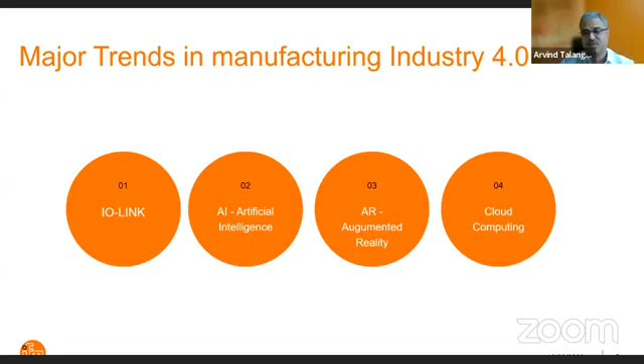So the question is, what prevents the technology from being adopted quickly? This is not a new concept. Many new technologies have come and gone from the industrial space, claiming to be the latest and greatest. The main barriers usually revolve around three major C's: cost, change, and complexity. This is the main reason why new tech isn't adopted quickly, or at all.

But what if we could eliminate these barriers? What would you do? This gives an understanding of how industry revolutions took place with respect to technologies and the importance of Industry 4.0.

As an industrial company, whether you are solving a specific problem or working through a large digital transformation project, collecting and analyzing data is a critical part of the solution. The industrial Internet of Things, IoT, enables intelligent decision making by leveraging data to optimize operations, increase performance and availability of equipment, improve product quality and shorten time to market.

So IoT would accelerate and simplify the process of creating connected products and services for industrial environments, with expert application of technology to collect machine generated data, networking of all kinds, and advanced big data analytics. So what is Industry 4.0?

The most recent evolution in manufacturing, called Industry 4.0, is actually enhancing computer assisted manufacturing through machine learning and smart technology. The latest industry evolution brought the manufacturing process into an age where computers and automated machines enabled factories to produce products on a massive scale.

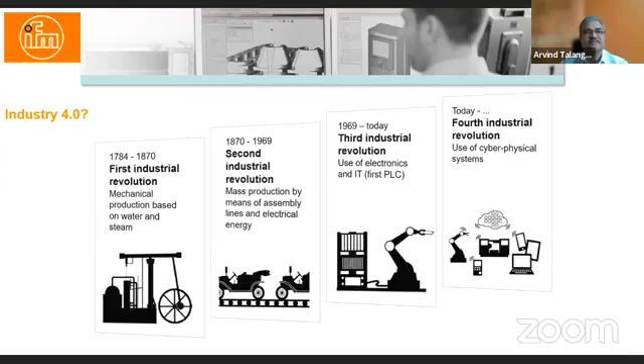So in order to remain competitive, companies regardless of their size will have to invest in digital technology. It's just not enough to see opportunities, we also have to seize them.

According to some experts, the most important prerequisites for this trend are intelligent products and innovations, as well as new business models, which only become possible through digitalization. On one hand, they have to develop in an agile way; on the other hand, they have to support their employees and focus on the requirements of the networked customer.

Digitalization specialists think that particularly small and medium-sized companies will have to become active. Despite reservations and initial difficulties, companies have come to the same conclusion, as becomes visible in a recent survey. Despite the impression that digitalization may be a threat, more than 80% of those asked stated that Industry 4.0 is more a chance than a risk.

Nevertheless, being aware of the potential offered by digitalization is not enough. It is not enough to see opportunities; you also have to seize them.

The information gained helps companies of all industries to improve their value chains and optimize their processes. This is where the role of data actually comes into the picture. For industry, this means new business models may emerge from evaluated machines, the use of sensors, and real-time processing of vast data volumes.

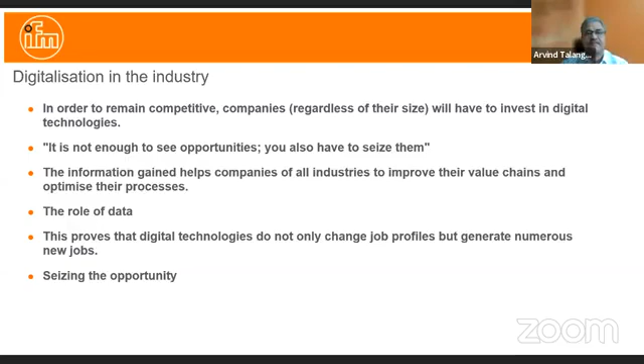This is exactly what we have actually tried to accomplish. Some of the fundamentals of digital transformation are digitalization by virtualization of all devices through an Internet of Things, and convergence of organizational and physical processes, where our goals are identification and avoidance of waste and inefficiencies. There are numerous opportunities, in fact.

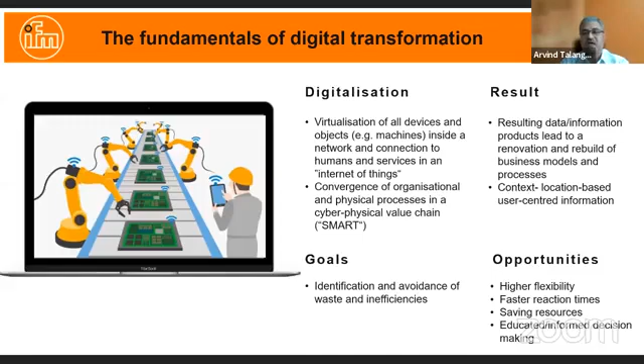The fruits of digitalization, and how digital technologies create new jobs. Digitalization changes all areas of our life, such as leisure time, consumption patterns, and the working environment also.

On one hand, there are many more IT expert jobs vacant in Europe. On the other hand, about 1 million people have to learn and revise their way of thinking. No doubt the working environment is in flux; both chances and risks are to be addressed.

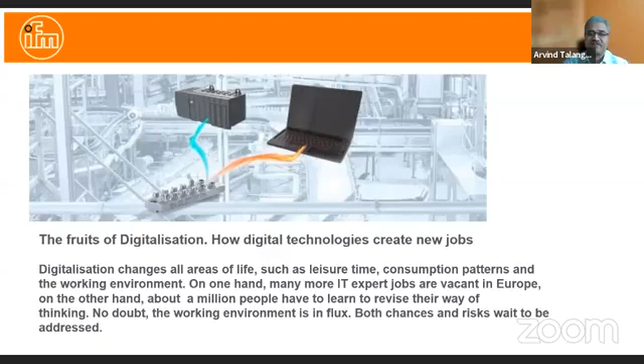A typical digital value chain would be, for example, from R&D to sales and supply chain, to manufacturing and after-market service. The whole of the chain includes smart products, energy management, and track and trace applications. So the entire digital value chain gives you transparency, flexibility, individualization, and integration — these are the key principles here.

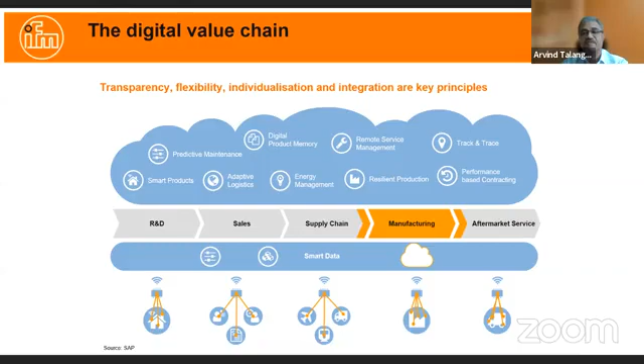One of the very first and prominent state-of-the-art technologies is the advancement of IO-Link, which is a communication protocol towards sensors and actuators.

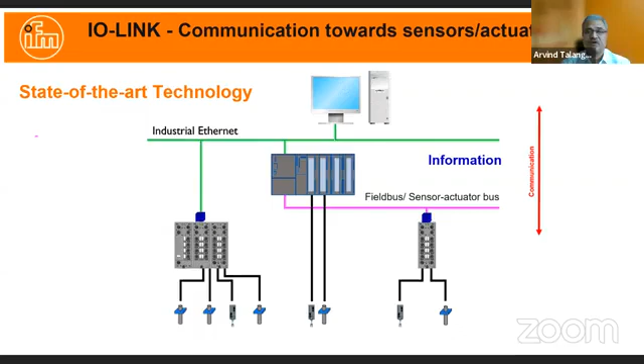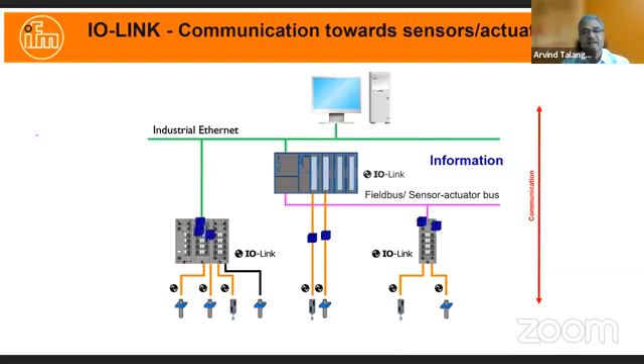As you can see, there are field devices that are actually connected to controllers. Now, with the help of IO-Link, which is a new way of connecting field devices, you get not only the data, but also the ability to control the process and the machines.

This IO-Link, which is one of the major trends in Industry 4.0, is the first step for IoT. It enables process transparence from the sensors to ERP, with different measured values from one sensor. Another advantage is tamper-free operation, with unique identification of each and every element of the sensors. These sensors can be replaced very easily, and almost all control manufacturers are involved in this IO-Link development.

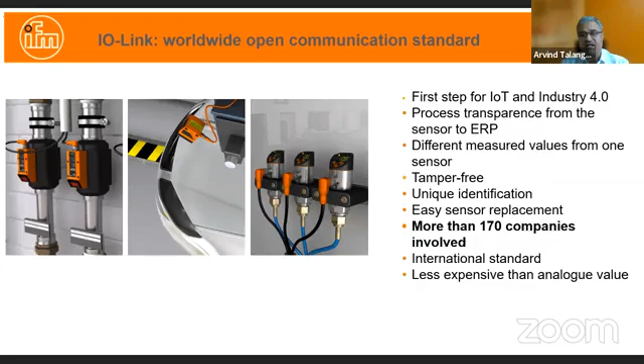And this is, as already informed, less expensive than analog value. You can see here the consortium of IO-Link. Almost all the control manufacturers and related companies are into this IO-Link manufacturing.

In short, in conventional systems, values of analog sensors undergo several analog to digital conversions until they finally reach the PLC. This is where we try to find out the difference between how analog is connected versus IO-Link.

For example, a pressure sensor having 5.5 bar pressure, when connected to analog value here in the PLC, actually gets converted from analog to digital and digital to analog. In the output, your 5.5 bar input pressure comes to 5.3 bar. So there is a loss of almost 0.2 bar, because of the analog transmission from the field device to the controller.

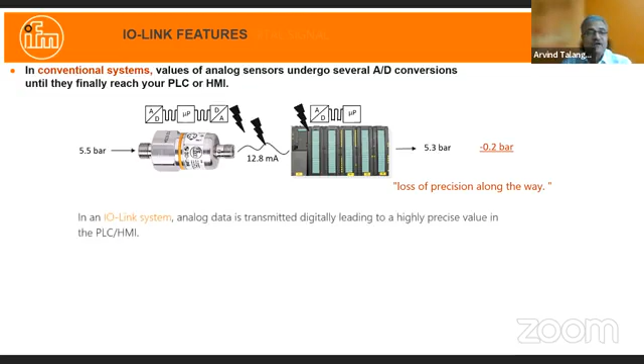While in the case of IO-Link, this analog data is transmitted digitally. So there is always high precision coming in, because this 5.5 bar pressure, when converted to the PLC, is exactly 5.5 bar. This is the advantage of IO-Link when connecting any field devices to the manufacturing.

Some of the trends in IO-Link are, say, profiles. In the case of profiles, via the function block, the PLC can access the process values of IO-Link devices from different manufacturers online at any time. Since the data is provided in a standardized way, thanks to the communication specification and the profile parameters stored in the sensors, these different sensors will have an IODD file, which contains bit information about the output, the diagnostic data, all this is inside the IODD file.

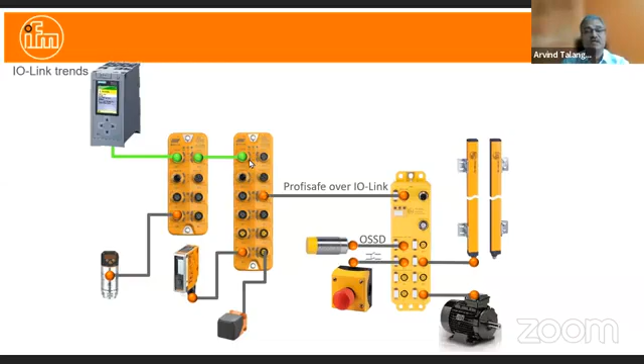Another trend is IO-Link safety, because over the years IO-Link has become established as a sensor actuation communication system. To benefit from this in the field of safety technology, IO-Link safety has also been developed, offering advantages such as reduced wiring, fewer conventional input and output cards needed, and the use of analog measured values for condition monitoring. A typical IO-Link safety setup is like this: an IO-Link ProfiSafe card, which has input from safety products like safety barriers, safety proximity switches, and so on, connected to a ProfiSafe card, and this becomes one port of an IO-Link master to which all other field devices are connected.

There is one more trend: wireless. In the field of automation, mobile communication standards such as IO-Link, 5G, or even Wi-Fi 6 are becoming building blocks for real-time machine-to-machine communication. So IO-Link is also coming into this space.

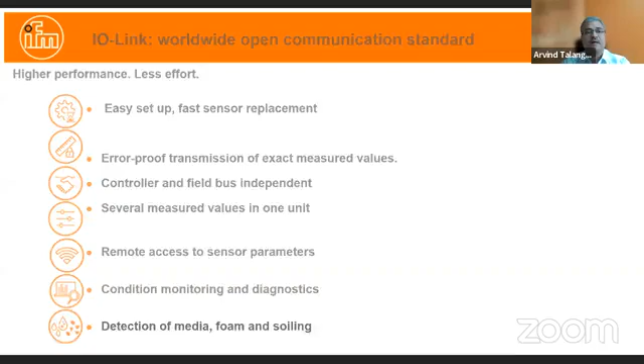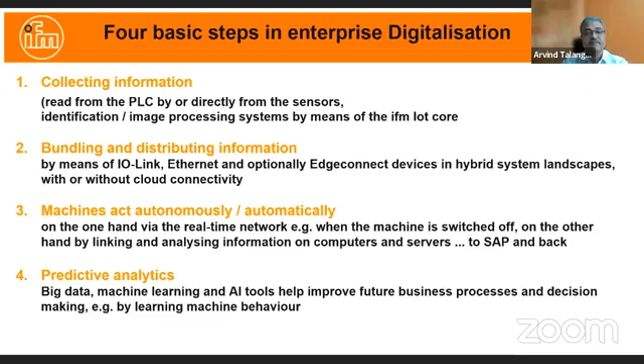And the last is predictive analytics. Big data, machine learning, and AI tools help improve future business processes and decisions by making machine behavior learning easier. A typical example here with Industry 4.0 is with the help of IO-Link.

Here you can see 2 motors with vibration sensors mounted on them, which are connected to an IO-Link master. This IO-Link master gives you data of a root cause report. It can also give you raw data. For example, in case of vibration, it gives you data of VRMS, ARMS, A peak, crest factor, and temperature.

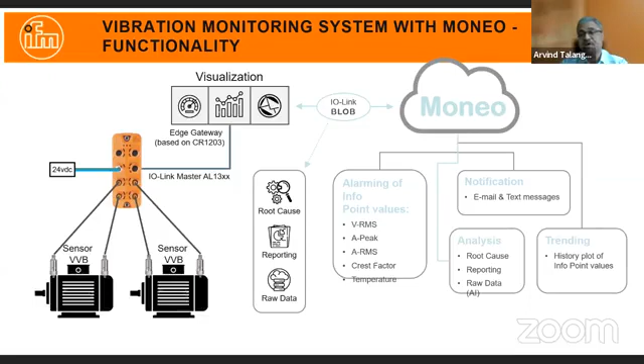So all these alarming points are being taken care of. The analysis is also taken by root cause, reporting, and raw data. It also gives you notification, email, and text messages, and it also gives you a plotting of history or reports with this visualization and IO-Link BLOB.

Another trend is, for example, artificial intelligence. Artificial intelligence has performed routine tasks for some time now, but with machine learning, the technology is poised to increase its scope. Traditionally, artificial intelligence operates from a set of rules that provide guidelines for actions. Today, AI goes back to review decisions made by human beings and uses it to help create new rules or refinements to existing rules. This increases the number of use cases where AI can operate independently.

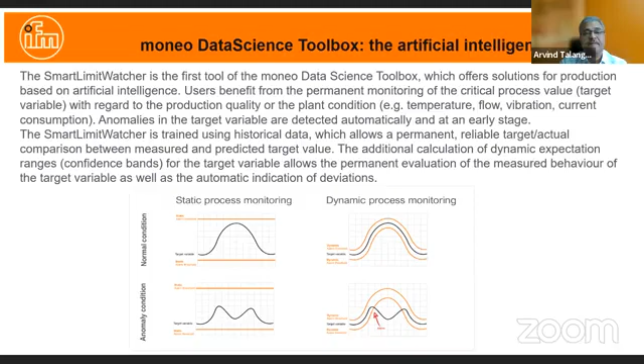Here, for example, a SmartLimitWatcher of IFM Electronic is the tool of the moneo DataScience Toolbox, which offers solutions based on artificial intelligence. Users benefit from the permanent monitoring of critical process values with regard to production quality or plant condition, maybe temperature, flow, vibration, or current. We are actually trying to differentiate a static process monitoring as a normal condition versus an automatic dynamic process monitoring. One example is smart pump monitoring, extensive condition monitoring of a supply pump.

The supply pump is actually a critical component of a CIP plant. It ensures media circulation through the entire system. If the supply pump fails, the entire plant process will come to a halt. Now, as the pump is operated at various speeds depending on the cleaning steps, static monitoring is very difficult. The aim is to implement artificial intelligence-based pump monitoring in order to detect and report any deviation of the operating state in time.

So maintenance works can be carried out in real time. Many parameters of the pump, like current flow rate, pump outlet, current pressure, vibration data, operating hours, and pump motor surface temperature - all these parameters are being taken care of by artificial intelligence.

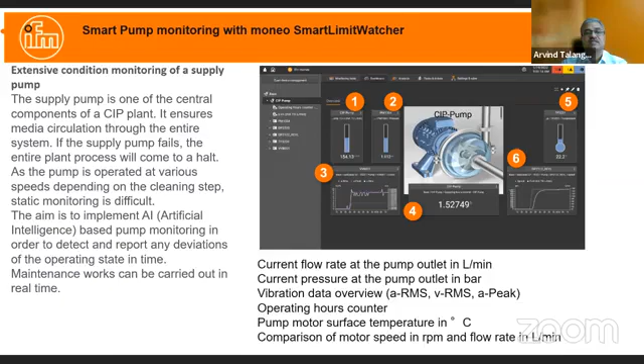Another trend is augmented reality. Actually, augmented reality replaces, in a common man's sense, a paper with a screen positioned in the worker's view. The screen superimposes work instructions on the physical material, so the operator can see the right way how the work should be done. This helps ensure that workers use the latest processes and revisions and can also reinforce training. As a result, productivity and efficiency improve and costs go down.

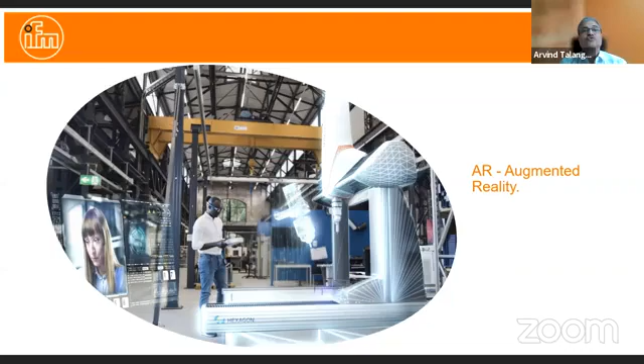One of the new AR headsets, Magic Leap 2, features the PMD, that is Photonic Mixer Device 3D technology, which has been developed by IFM Electronic, and which actually finds out the depth. Some examples in the automotive market are that this technology is used to operate an infotainment system, by gesture control to monitor occupants in order to trigger airbags intelligently. In the exterior area, the 3D technology covers environmental monitoring in the near field around the car.

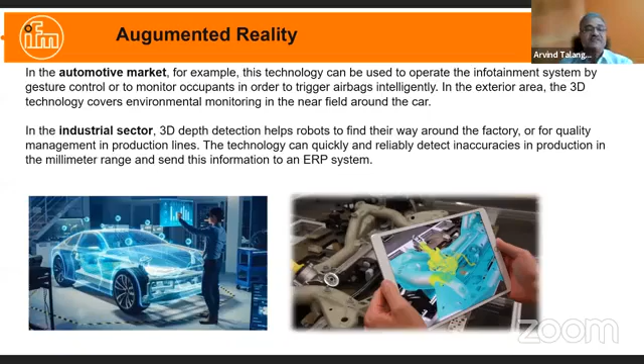In the industrial sector, for example, 3D depth detection helps robots find their way around the factory, or for quality management in the production line. The technology can quickly and reliably detect inaccuracy in production in the millimeter range and send this information to an ERP system.

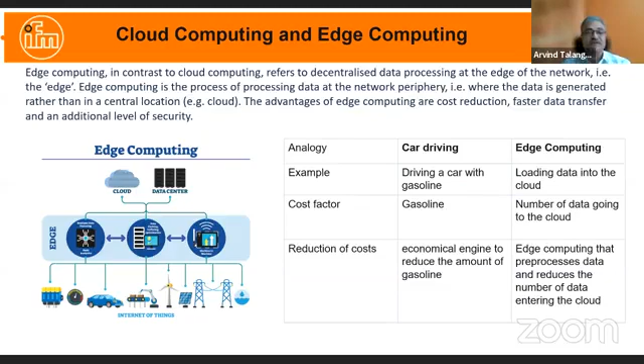Edge computing, in contrast to cloud computing, refers to decentralized data processing at the edge. Edge computing is the process of processing data at the network periphery, where the data is generated, rather than in a central location. The advantage of edge computing is cost reduction, faster data transfer, and an additional level of security. Here we can see some analogy of how car driving and edge computing relate. There are different types of cloud computing: private cloud, public cloud, and hybrid cloud. Depending upon our requirement, we can choose different clouds.

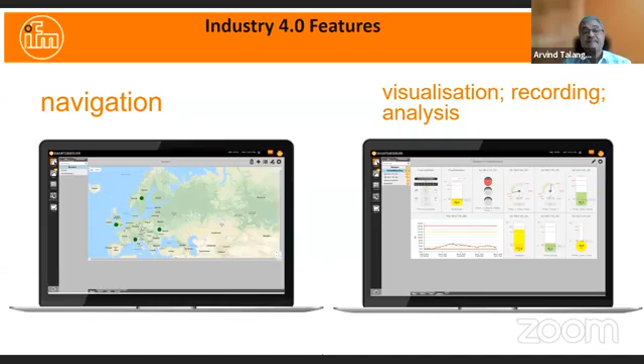So this kind of Industry 4.0 trend helps you in getting navigation, visualization, recording, and analysis of the data. So visualization and evaluation of the process value, that is data acquisition and diagnostic. Detect and avoid adverse operating conditions. Process monitoring, that is analysis and trend creation. Ultimately avoid consequential damage by timely intervention. And finally, it reduces repair and maintenance cost.

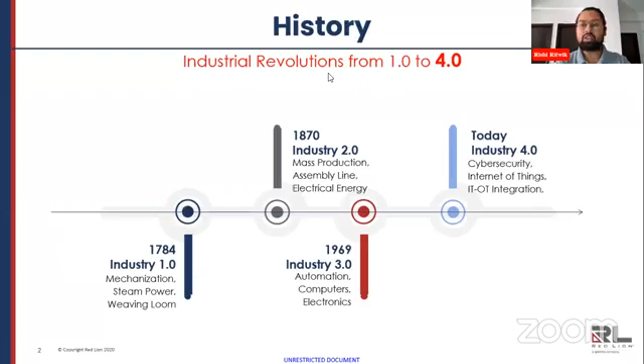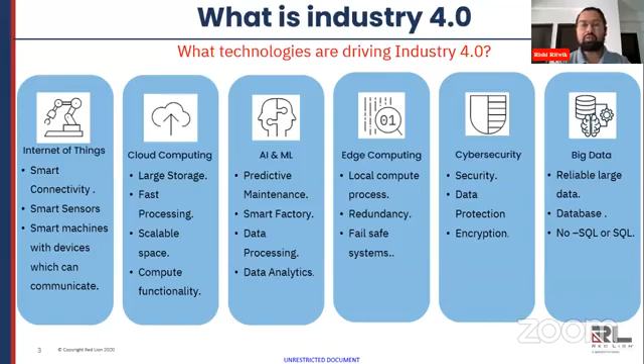Talking about the company Red Lion, Red Lion has since 1972 been serving the field of industrial automation and is trusted by thousands of companies. We are a part of Spectris PLC, a London Stock Exchange listed, UK based company which takes care of Red Lion. We manufacture components which help users achieve and overcome the two difficulties which we have discussed.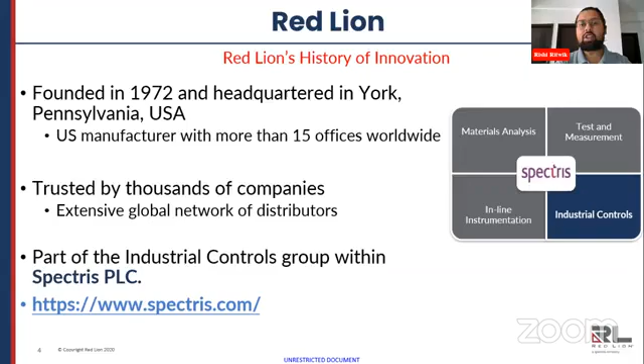To overcome the complexity of the problem and make the change easy for the consumer to switch their devices to Industry 4.0, our product portfolio includes all the tools which help users to integrate, escalate, protect their data, analyze it, and help with OT-IT convergence.

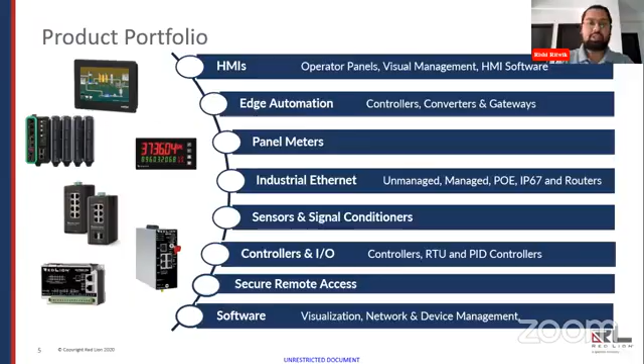IT-OT convergence is a basic requirement. The main challenge here is access of IT to OT data, because in Industry 4.0 the trend is that information technology and operational technology are joining hands to make the data more reliable and profitable. For customized production, business processes need to link with operational technology and processes so that production is seamless and losses and breakdowns are minimized to achieve the target.

The toughest challenge is that we have two misaligned goal integrations. IT has security, availability, reliability, and data scalability, while OT has production uptime, throughput, efficiency, quality, and safety. So the goal alignment is different, but we need integration to achieve customized production and Industry 4.0.

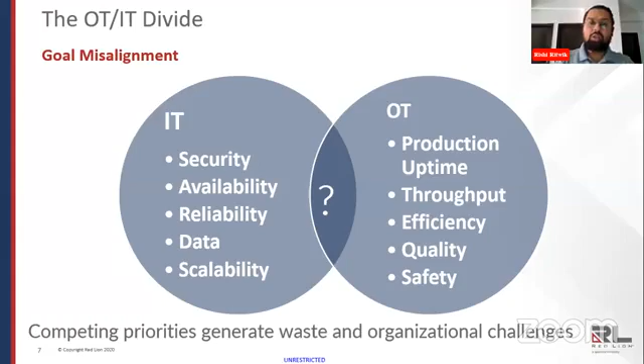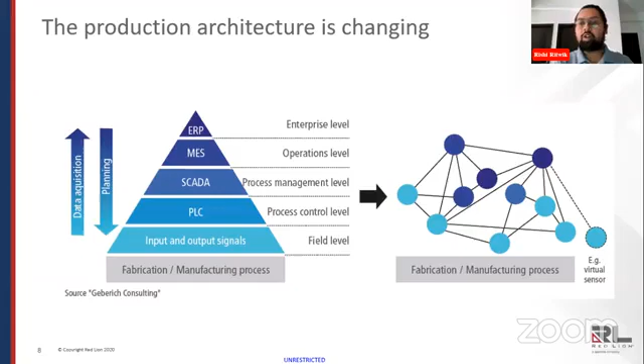To overcome this, the production architecture is also changing. You can see it moving from input-output signals to PLC, SCADA, MES, ERP systems, all getting into the fabrication and manufacturing processes. Data acquisition and data planning are both two-way sources in an operational industry today, and Red Lion devices like Crimson help combine these two processes effectively.

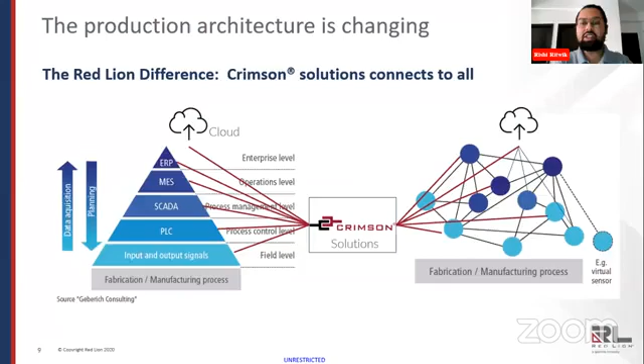These devices help users easily connect and get all the data, bringing IT and OT infrastructure to the same level and place through easy integration with the Crimson software. The Crimson software is rugged, advanced, and very easy to use, requiring no expertise in IT or OT.

With existing infrastructure and existing manpower, we can integrate and use these devices to scale our existing assets to an Industry 4.0 platform. While new developments make it easy to put in smart sensors, for retrofitting it's very useful to use a device intelligent enough to bring your existing setup into the new environment and technology.

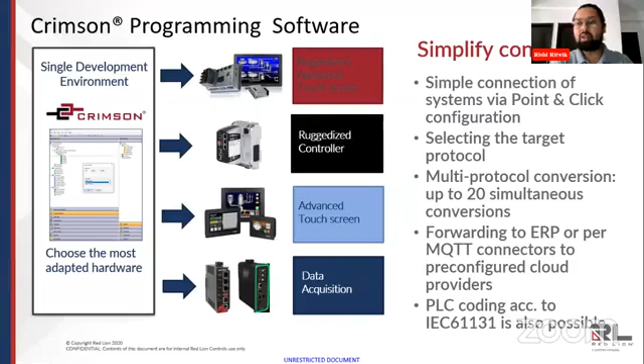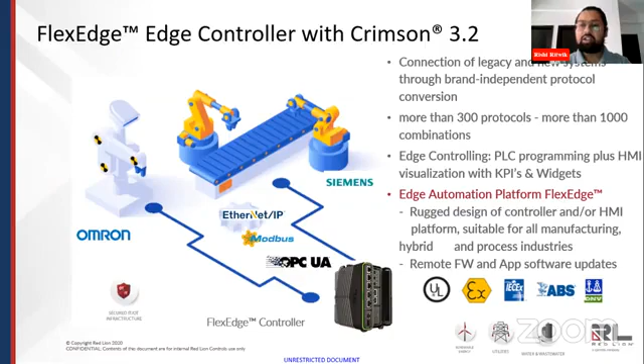All the Red Lion units can handle up to 20 protocols simultaneously and have a library of over 300 protocols inbuilt. The customer only needs to connect their OT devices or assets directly to these devices. Since it has an inbuilt protocol library and edge computing, customers can easily use that library to integrate with multiple vendor-level devices into the Red Lion devices.

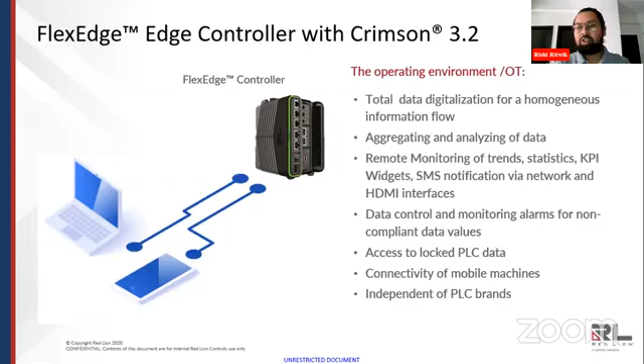After retrieving the data, these devices can be used for data control, monitoring, aggregating, and analyzing. This fulfills the integral part of Industry 4.0 - data digitalization, data analysis, and edge computing - and also helps push all this data to the IT infrastructure.

It can push data to SQL servers and to the cloud via MQTT, supporting all the clouds and SCADA traffic well known in the industry, like AWS or Azure, or generic MQTT where we can use Node-RED or Mosquitto as locally hosted servers. The transmission is totally secured, and the device is modular.

These devices are 5G ready. Technology is changing too fast, so it's very much needed for industry to adopt technology that can be modular, because the pace of change we've seen in technology in the past decade is even faster now in the current decade. Technology will definitely keep changing fast, so our hardware should be capable of adapting to that easily so we can use it for the infrastructure.

One of the main benefits of this hardware is that it's very compact in design, pluggable, modular, and very easy to use. You can easily gather input from a PLC, and since we have a library, we can integrate sensors directly and also integrate PLCs directly with the devices.

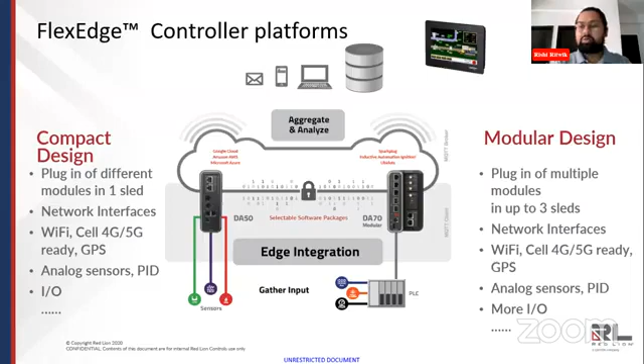The software Crimson 3.2 is very easy to use and comes as a package with the hardware. So there is no licensing, which we normally see in software trends, and no annual maintenance. You can use this software for configuring the device, and the device can also be used as a runtime.

There are modular type controllers and modular type software. So the hardware is also modular and the software is also modular. This gives a versatile facility to customers to choose according to their need and escalate it to the next level in the existing setup.

Some of the claims of applications which can be developed with this hardware: it can analyze line downtime and escalate it to different levels with different scenarios, whether it is a mechanical breakdown or an electrical breakdown, so maintenance can be implemented immediately. This way we can minimize OT level infrastructure issues by reducing breakdown.

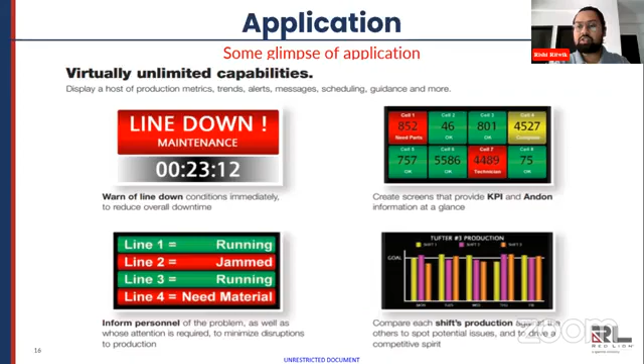We can also design our processes with a local andon system. A smart andon can be integrated with these devices, giving a clear idea of what's going on in the processes and the plant. And we can have a dashboard where we can see the performance of different lines and different processes at a single place.

We can also do some edge computing, calculating KPIs, OEE, availability rate, and all these things inbuilt in this hardware.

This hardware can also be used to connect to a smart TV, where you can publish data onto a larger screen and view it all.

These hardwares are also very effectively used for bringing all this data to the IT infrastructure, so IT doesn't have to rack their brains capturing this data. These devices help overcome the challenges of IT-OT integration very easily with 300 plus protocols and other features.

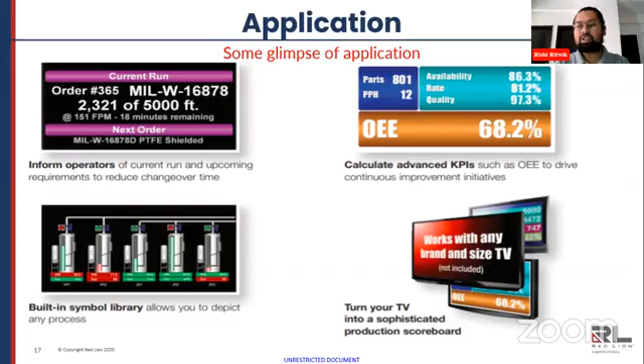This is a running line example. You can see assembly line monitoring, where the operator gets immediate notification of material breakdown, system fault, or quality issues. Any issue can be immediately intimated, and runtime and performance can be seen live on a real-time basis, so operator performance and manpower efficiency increase with real-time monitoring.

We also work in the field of inverter monitoring, weather monitoring, and solar monitoring systems, where data is remotely captured and sent to cloud servers, enabling automated billing and automated generation reports through the IT infrastructure.

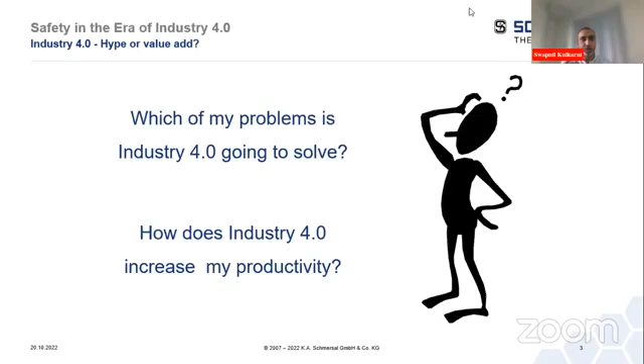Yeah, so can you move to the next slide, Subhajit? We feel like as of now, these are 9 different technologies. These are really helping a lot and transforming this Industry 4.0. It's not a component business anymore, it's all about solution, it's like an ecosystem.

If you take any of such technologies, you need more and more. It cannot even be finished in one day, because there are a lot of things to be discussed about any of the aspects if you take it.

What Schmersal is focusing on, there are certain areas or technologies we have identified which are very useful for us. We just try to see, out of these 9 technologies, which ones we are using, in the upcoming slides, and how using this we have evolved to convert this buzzword into reality now.

So here we have a specialist, Sachit, who is quite experienced, as you mentioned, Subhajit. He is quite passionate about IoT 4.0 and all, so I just invited him, and he will take over the next discussion further.

Thank you, Swapnil, very much. First, let me give you a brief about that. Schmersal is basically a product company, so they are mainly into manufacturing of safety products. With respect to the safety products, we are implementing Industry 4.0 by adopting IO-Link safety, which one of our panelists also mentioned, and we are also using OPC UA and MQTT communication in our gateways to send the data from our field devices to the cloud. So this is where we, on the product side, are working.

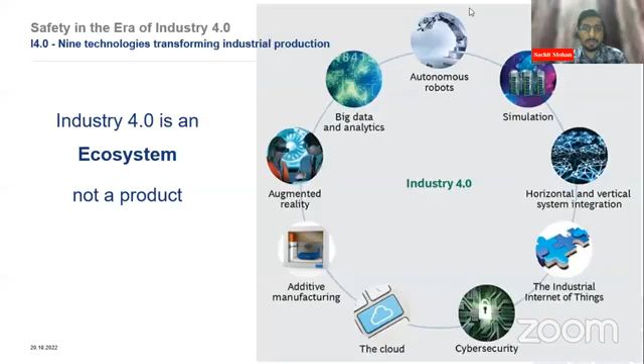Parallelly, we are also working on consultancy, where we provide consultancy services to our customers, in which we do different kinds of analysis, safety risk assessment, and there we have adopted the Industry 4.0 parameters. First of all, we will talk about the things in which Schmersal is working on.

First of all, we start with the risk assessment. So we have different kinds of things in which we work with respect to providing consultancy services to our customers regarding safety monitoring. First is the risk assessment. Then we have the planning and engineering part, where after the risk assessment we do the planning and engineering of how the safety should be analyzed and what actions should be taken to implement the safety parameters, to fulfill the safety parameters.

Then we have the installation and the commissioning. So once we do the planning and engineering part, then we do the installation and commissioning. And last comes the operations, which includes condition monitoring, maintenance, troubleshooting, and predictive maintenance. So one by one, we will take all these four blocks and define how we are adopting IoT technologies, or Industry 4.0 technologies, in each block.

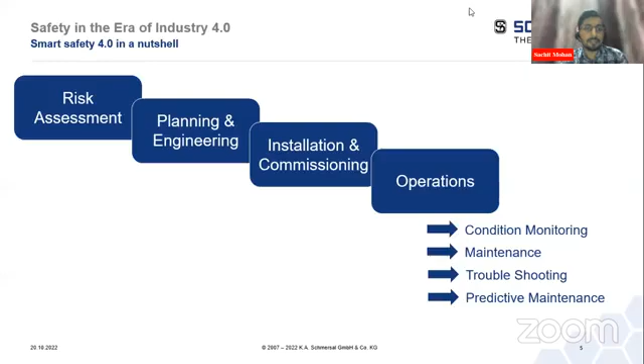First, let's talk about risk assessment. Earlier, in risk assessment, we generally used to take photographs of the machine and do the analysis manually. We store the photographs, do different kinds of visual inspections, and see where the inspection has to be carried out to implement fencing or other safety parameters around the machine.

Now we take the photographs in a similar manner, do checklisting, and upload that data on the cloud. Earlier, this data was only available with the people doing the safety analysis, but now it's a central repository where we analyze the data with different algorithms which check for safety loopholes that need to be taken care of. So this is where we adopt cloud and simulation technology to implement Industry 4.0.

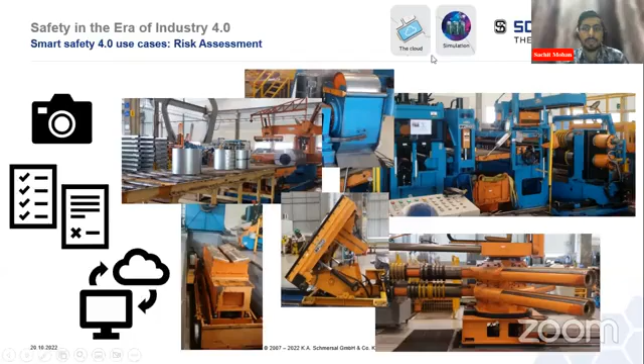Then we go to the next section, the planning and engineering part. Suppose we have a machine - once we do the risk assessment, we have to do the planning and engineering where we implement safety fencing, or give suggestions on what safety measures need to be taken. In this too, we adopt Industry 4.0 by taking a 3D scan of the actual machine.

Once the 3D scan of the machine is taken, it's uploaded to the cloud and creates a 3D model of the actual machine - this is a virtual model. After this virtual model, we can implement the commissioning part. We can do different engineering sections to determine where the safety fencing has to be done and what safety parameters need to be taken around.

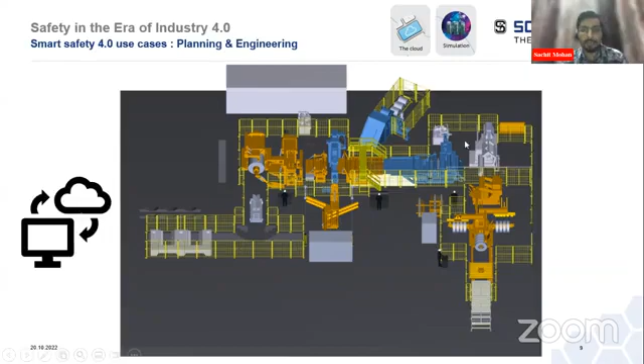So after the planning and engineering section, that machine will look like this - with the fencing done around the machine and the other things that needed to be taken care of.

Next is the step where we create a digital twin of the actual machine. The digital twin is basically a digital asset - we have a physical machine, and we're creating a virtual machine, sending data from the actual machine to the digital twin.

We send this data using our different IoT gateways. We already have devices equipped with IO-Link safety, connecting to our safety controllers, which are equipped with OPC UA and MQTT communication. Through those gateways, we collect data from our devices, send it to our gateways, and from the gateways, send it to the cloud platform.

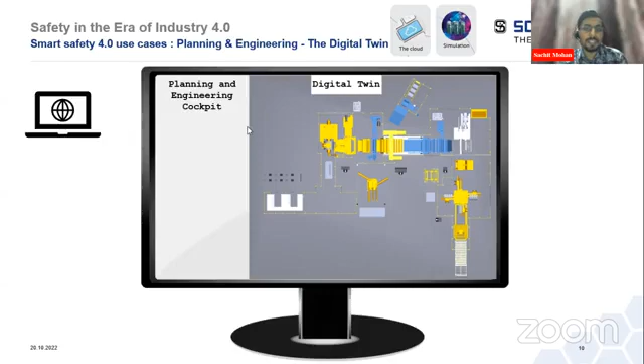This digital twin is actually linked with the data we're receiving from the physical assets. This creates a digital twin, or a virtual environment, where we can do different kinds of testing and commissioning. Once all that testing and commissioning has been done, we go for the go-live session.

So here comes my third block. In the planning and engineering section, we also have an AR app where we can go to the physical asset. We can show our mobile screen, or the iPad, towards the machine, which can form a fencing part, so it's very easy to analyze how it will look once implemented in the actual scenario.

This is how it works.

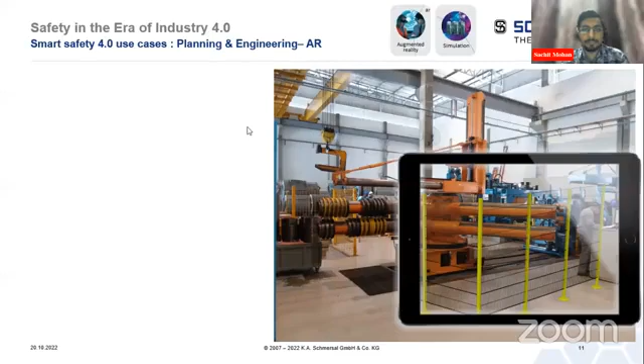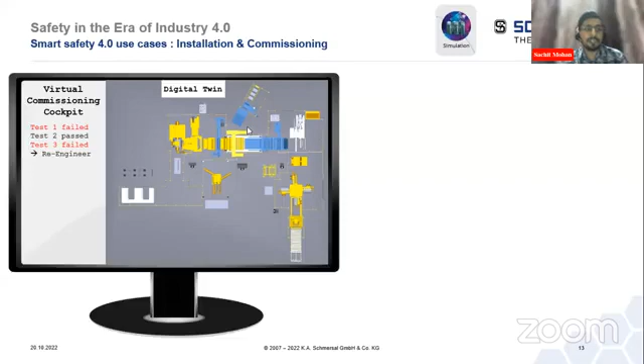Then we have the installation and commissioning section, in which we have the digital twin where we do different kinds of testing. Suppose we run test one and it fails, test two passes, test three still fails - so we do the re-engineering section. Now the errors are decreased to one, so again we do the re-engineering part. Once all tests are passed, we go on-site and implement the fencing and everything, whatever safety parameters we analyzed during the risk assessment section. Then we do the installation of the safety PLC program and the go-live section. This is how the installation and commissioning part works once we do the planning and everything.

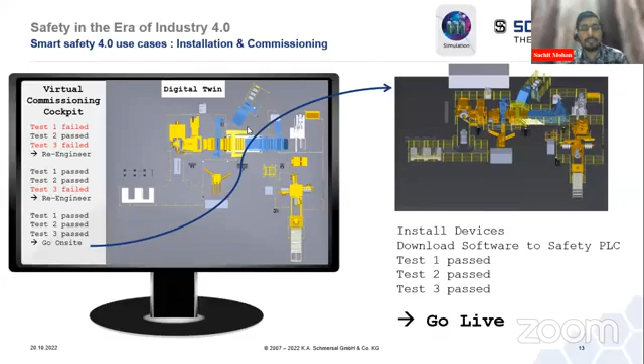So this is how we are using the technology known as simulation, or Industry 4.0 - how we are utilizing the Industry 4.0 ecosystem in this.

Then we have the maintenance part, which is very important. Suppose some component stops working - we have to do the analysis and diagnosis to figure out which component failed, when it failed, and how we can resolve that. This platform can help with that too. We have the machine data, so we can see how many times the door was opened, and see the actual statistics of that machine. Suppose some peak appears - we can also segment different time frames, like different shifts, and figure out in which shift how many times the door was operated.

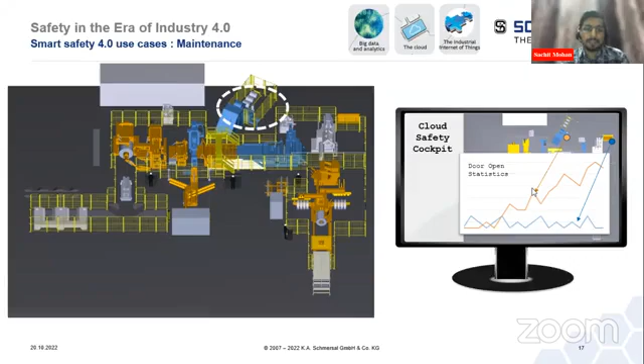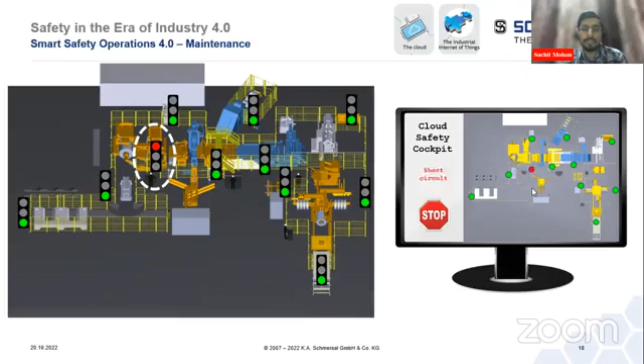Then suppose some error comes up - it will highlight on the safety cockpit what the error is. Earlier, before implementing this kind of solution, the operator had to physically go to the machine and see how many blinks were happening to figure out the error. Now once we get the data from the actual asset, we have an algorithm running on the backend of our cloud safety cockpit which will highlight the error and populate it on the screen, so you can figure it out and resolve it as soon as possible.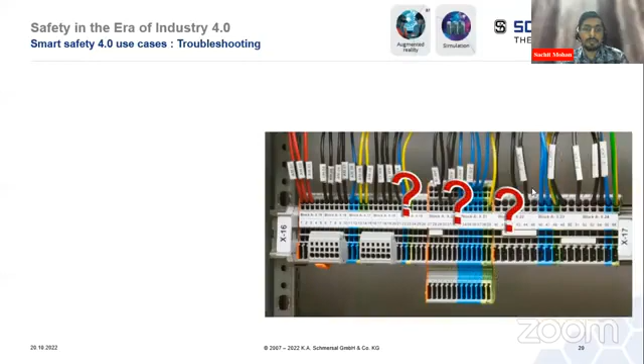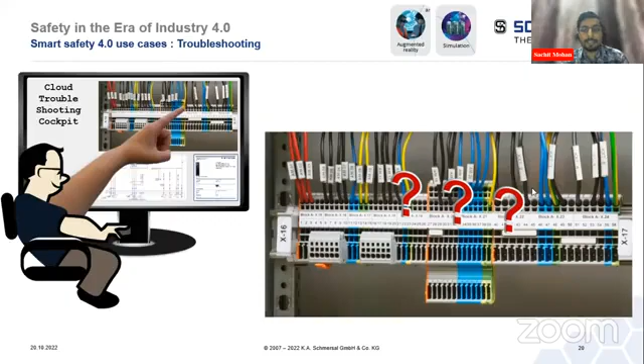Then comes the troubleshooting part. Suppose we have a remote support team and want to suggest how an error or problem has to be resolved - for that we have a mobile app working on augmented reality. We have a central server where the operator lets us know what the error is, and with the help of the augmented reality app on the operator's side, he can move that screen towards the machine and figure out what the problem is and how it has to be resolved. This is how we are using augmented reality and simulation technology to implement Industry 4.0.

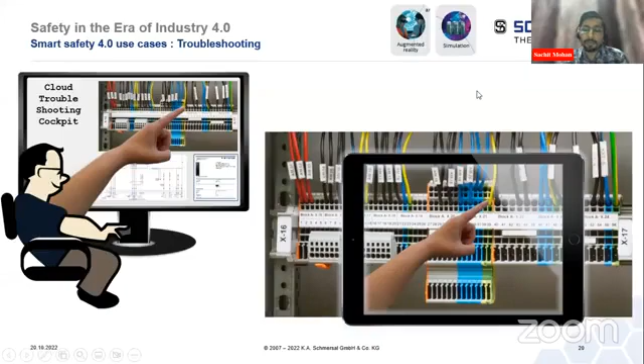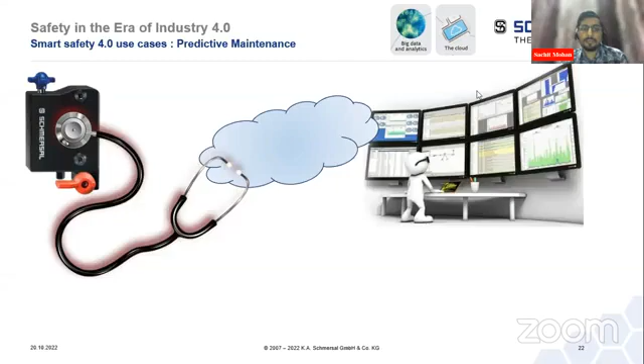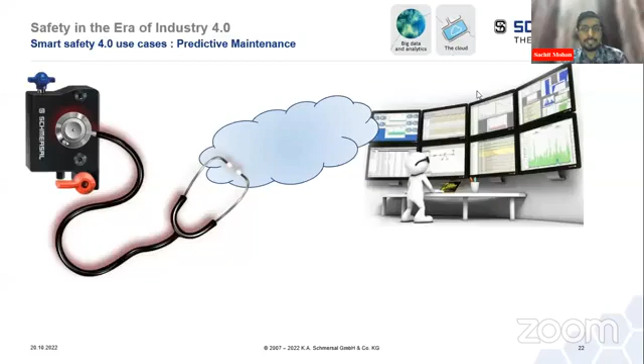Now we have the next case, which is predictive maintenance, which is very important. To decrease the shutdown of the machine and increase productivity, we have to do predictive maintenance. For that, again, we are capturing data from our components using our IoT gateway and sending it to the cloud. On the backend we have different AI and ML algorithms running which predict the time period when this device is going to fail and when we have to replace it. So in this we are using big data analytics and the cloud platform to find the remaining lifetime of the machine - it looks like this: 27 years, 12 weeks, 5 days, and 0 hours, which is decreasing.

So yes, these are some of the things on which we are utilizing our Industry 4.0 ecosystem to make our processes better and give a better safety solution to our customers.

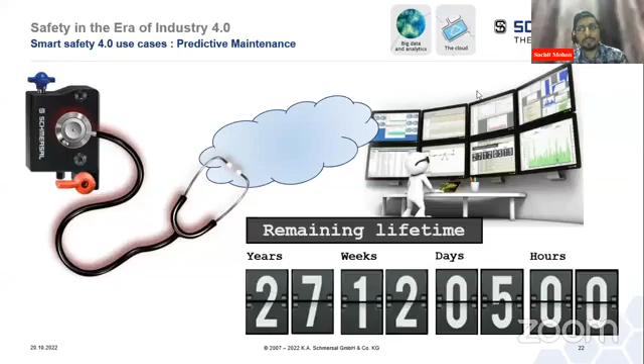Then we have different future challenges also, like mobile machines and self-learning robots, which will make use of AI and ML to make machines more intelligent and safe.